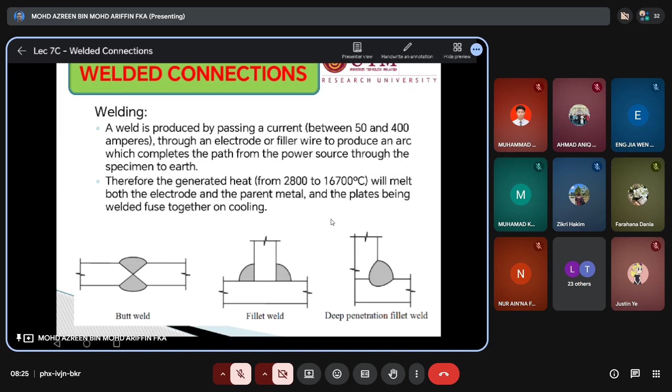Under welded connections, the most common types of welding processes consist of shielded metal arc welding, also known as stick welding.

The second process is gas metal arc welding, GMAW, or metal inert gas, MIG. Next, gas tungsten arc welding, or tungsten inert gas, TIG, GTAW. And the last one, flux core arc welding, or FCAW.

For the introduction, you need to search more reference books or articles. You can search in the library as well as online.

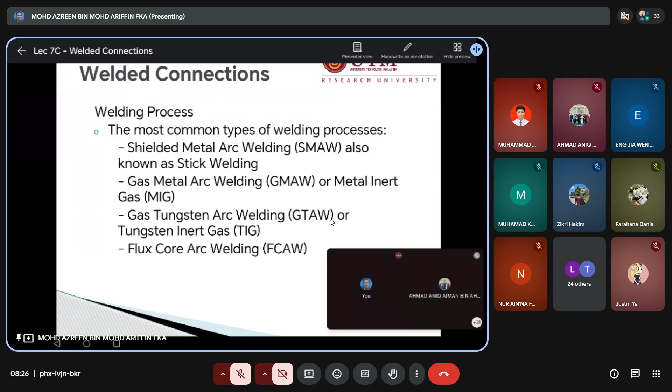This is the types mentioned just now: SMAW, GMAW, FCAW, and GTAW.

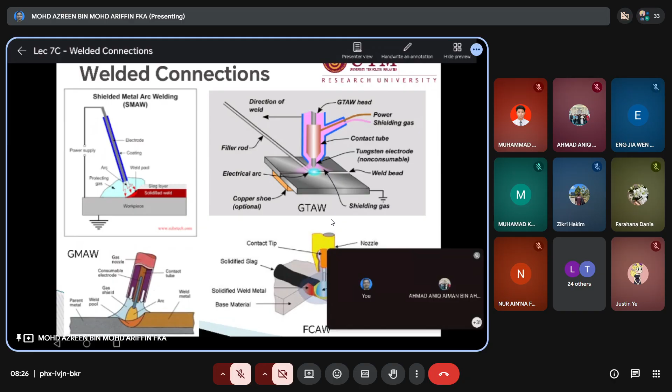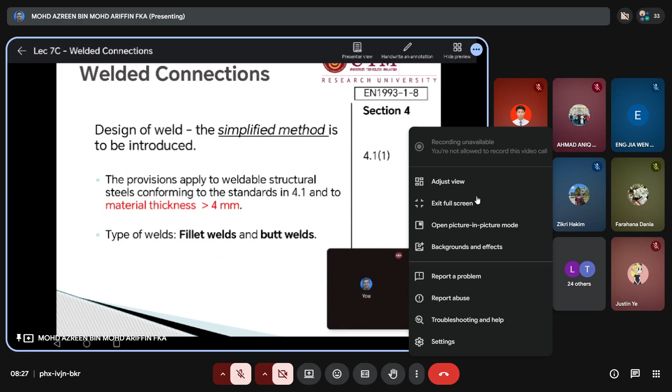Now look at EC3. I always mention you need to familiarize yourself with your EC3. Bring it everywhere, in soft copy and hard copy as well.

Can you turn to Part 1-8 again and again until you familiarize yourself with it? Part 1-8.

Part 1-8 is meant for the connection design for both types, bolted and welded. Today, you can refer to both welded connection.

The requirement is that material thickness must be more than 4 millimeters. And then we focus on the type of weld. Two types, which are fillet weld and butt weld.

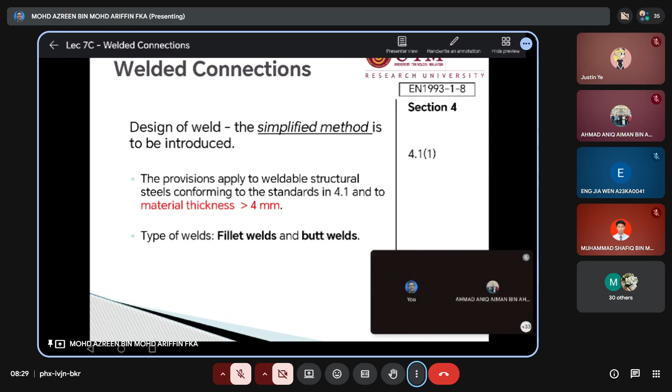Next, typical welded joint. Just now we mentioned that material thickness must be more than 4 millimeters for the welded joint, welding joint.

There are several types of joints, which are butt weld or butt joint, corner joint, T-joint, edge joint, and lap joint. So this is the type of welding joint.

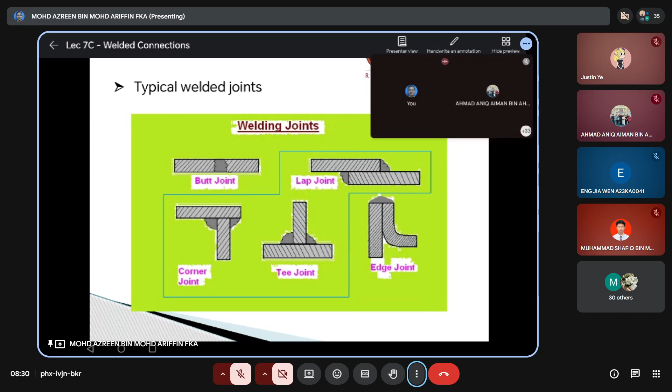Under 4.3.2.1 up to 4, especially for the fillet weld, there are requirements as well. The first is that the angle of intersection should be in the range of 60 degrees and 120 degrees.

Next, if less than 60 degrees, the weld should be considered to be a partial penetration butt weld. That is the requirement for fillet weld. If less than 60 degrees, the weld should be considered a partial penetration butt weld.

And if more than 120 degrees, the strength of the weld should be determined by testing. This is all under items 4.3.2.1 to 4.

If I refer to my EC3 book, turn to page 38 and 39, Part 1-8, please. You need to familiarize yourself with the EC3. I always mention you deal with time, so everything in the EC3 you need to recall and familiarize, so it's easy for you to refer to it.

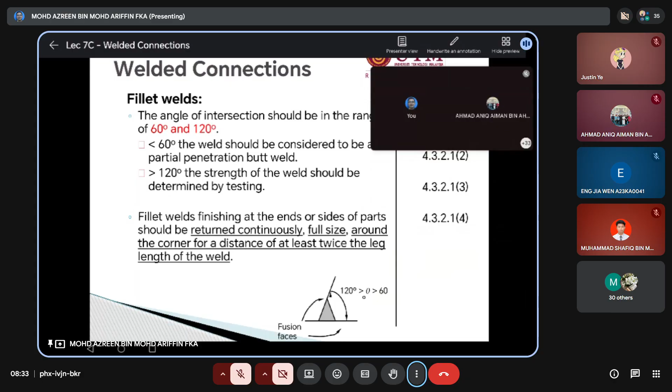The second point is: fillet weld finishing at the end or side of a part should be returned continuously, full size, around the corner for a distance of at least twice the leg length of the weld. Next requirement, okay, the second type is butt weld.

Mentioned under 4.3.4.1. Turn to page 40, 41, and 42, and so on.

The first part under butt weld: they mention a full penetration butt weld is defined as a weld that has complete penetration and fusion of weld and parent metal throughout the thickness of the joint.

The second point is partial penetration butt weld, defined as a weld that joint penetration which is less than the full thickness of the parent material.

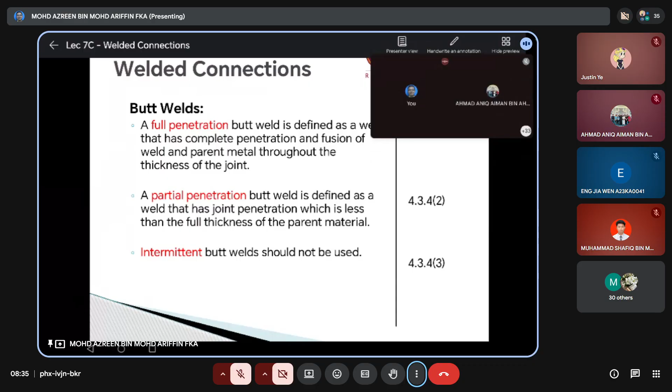Next, intermittent butt weld should not be used. Any questions so far? Are you following? Please respond. Anyone? Yes. Okay, next, thank you.

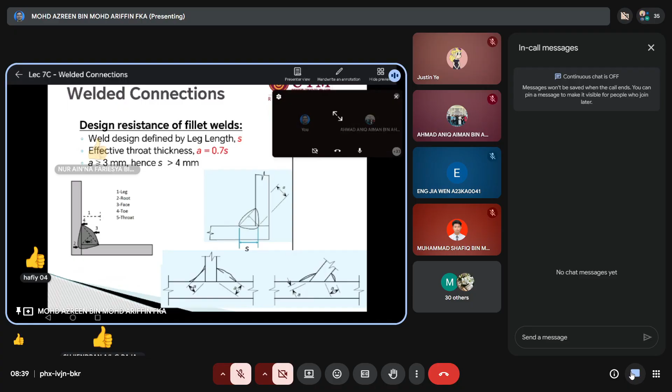Can you follow? Can you understand? A little bit more. Okay, you can put a sign if you follow, please. I cannot hear or see your response. Can you respond? Come on, please respond. Are you following?

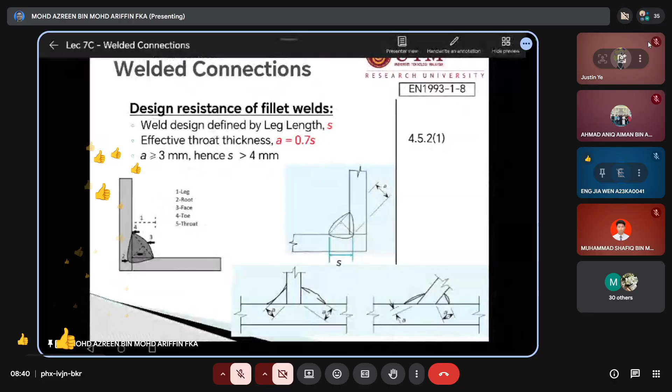Again, we should know LE as well, the symbol for effective length of weld. You can see in the figure, LE is equivalent to L, the total length, minus 2S, twice the leg length for both sides. That's what is meant by effective length of weld, symbol LE. This is under item 4.5.1 and 2.

Next, if LE is less than 30 millimeters or less than 6A, whichever is larger, it should not be designed to carry load.

Okay. LE equal to L minus 2A can conservatively be taken as L minus 2S.

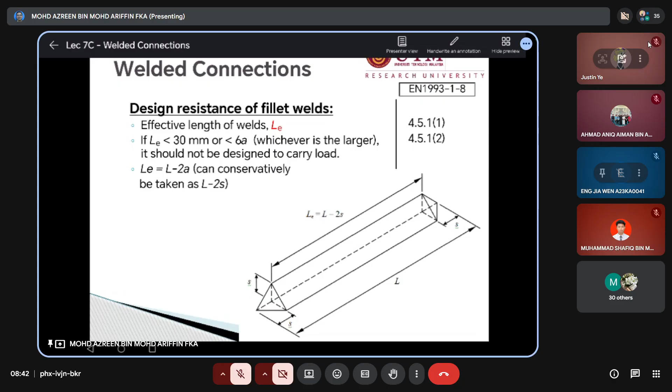Alright, next. After we know about LE equal to L minus 2S or L minus 2A, we can start design for resistance. Design resistance FW, the symbol is FWRD.

Okay, as a principle, we always know that the resistance must be more than the effects, action or loading, so that FWED must be less than or equal to FWRD.

Now we need to calculate FWRD, equal to FVWD, where FVWD is the design shear strength of the weld times A. FWED is the design value of the weld force per unit length, kilonewton per millimeter.

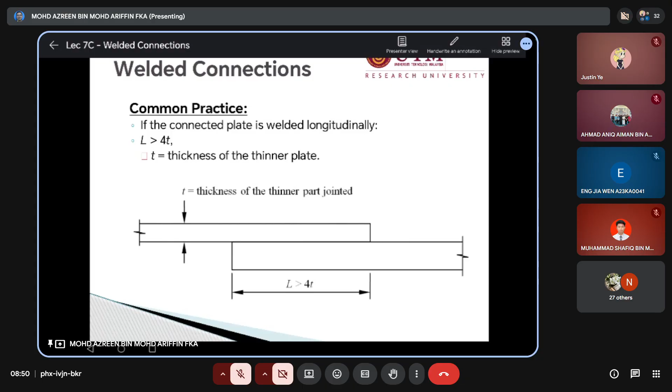Common practice: if the connected plate is welded longitudinally, L more than 4T, where T is the thickness of the thinner plate part jointed. You can see the figure showing you the thickness of the thinner part jointed, T, and the part of L that is jointed must be more than 4 times T.

How do you want to analyze this figure? Let me show you the solution. This figure shows you the solution based on several types of forces. Number one, weld subjected to axial force only. Same goes to the bolted connection - there are several types of analysis for the bolted connection.

It is under direct shear force or moment - outplane moment, or another one is in-plane moment. Same goes to the welded connection. It's different analysis for bolted and welded connection. Why? Of course, different material - one for bolted, another one for welded connection.

Now we can focus on how we want to design the welded connection based on axial force only. First of all, we can assume P as the forces, axial force, P. In this case, number one, assume P equivalent to LE1, effective length 1, plus LE2, effective length 2, based on the figure. If there is LE3, we need to add LE3 again. But in this case, there is only LE1 and LE2.

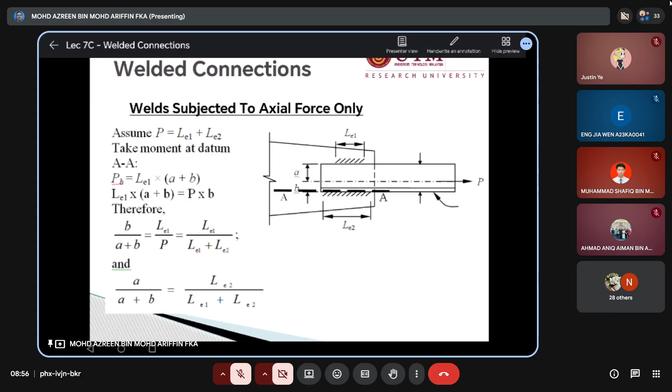This is equivalent to LE1 over P, equal to - so you need to elaborate more - LE1 divided by LE1 plus LE2. And if you take about A, then you need to ratio again: A plus B equal to LE2 divided by total LE1 plus LE2. Okay, let us make an example.

For this example, we call it example 5. Determine the weld length if only side welding is applied on the connection as depicted below.

Okay, given to you the size of this section: 65 times 50 times F, where F is the thickness, and L is the symbol for the section, single angle section. We can call this unequal single angle section because the sizes are not the same, 65 and 50. So we can call that unequal single angle section.

Value of B. Everybody? I don't want to continue if there is no response from you. No, Aina, okay, thank you. So how about A? How to get the value of A? Can you speak? Can you tell me how to get the value of A from the section given? Come on. Mohamad Amit, can you tell me how to get the value of A?

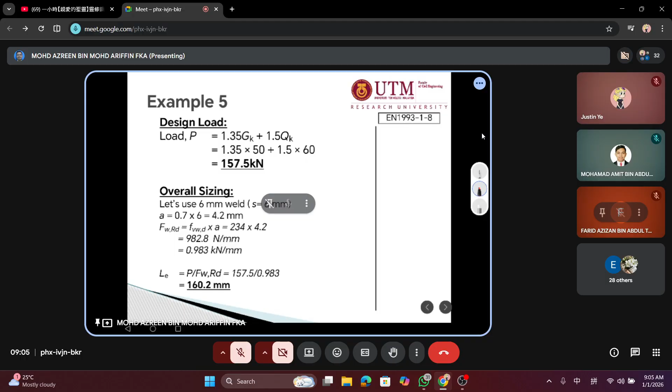Okay, for the next we have to know the LE, or overall sizing, LE and L1. Overall sizing, LE and L1. Okay, so this is under the axial force only. Axial force only. Okay, next, overall sizing, how to analyze it.

Let's use 6 millimeter. If there is no given leg length S, you can assume leg length S is equivalent to 6 millimeter. And then for the effective throat thickness A, equivalent to 0.7 S. Okay, you can straight away get the answer for A, 4.2 millimeter.

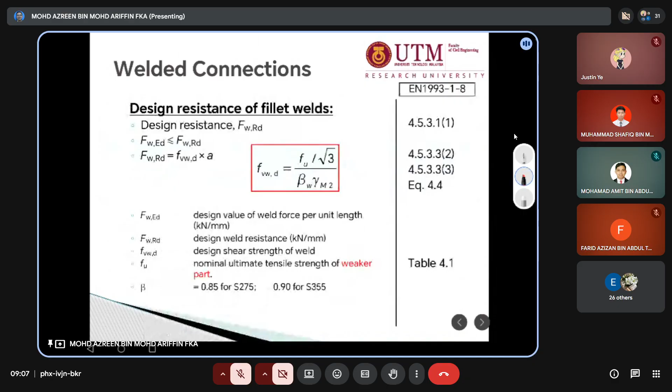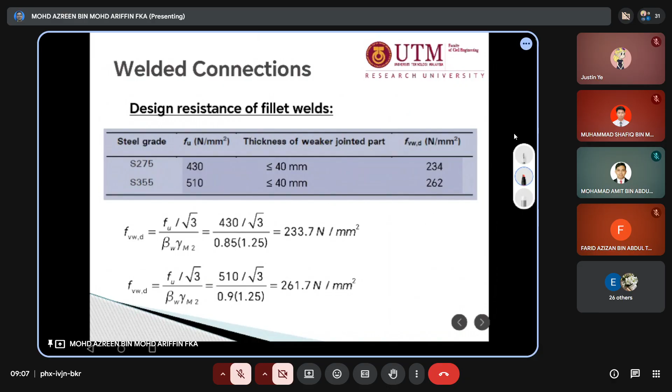Now you can have the design resistance FWRD, equivalent to FVWD times A. FVWD times A is equivalent to 234 times 4.2. 234 is from here: if your steel grade is S275, FU equivalent to 430, and FVWD equivalent to 234 Newton per millimeter square if the thickness of the weaker jointed part is less than 40 millimeter. Straight away you can have the value here, 234. Now you can convert to kilonewton per millimeter run.

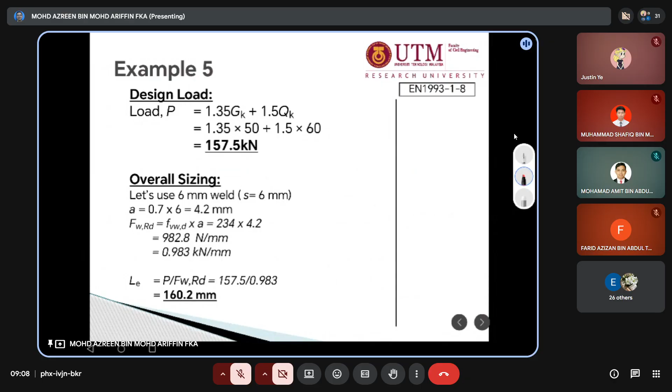Is equal to 0.983. So therefore, LE is equal to P over FWRD equal to 157.5 divided by 0.983. You can have the value of LE is equal to 160.2 millimeter. And then for the detail sizing,

LE is the total. It's the total of LE1 plus LE2 plus TW, where TW is the overall depth of the angle section, the overall depth of the angle section.

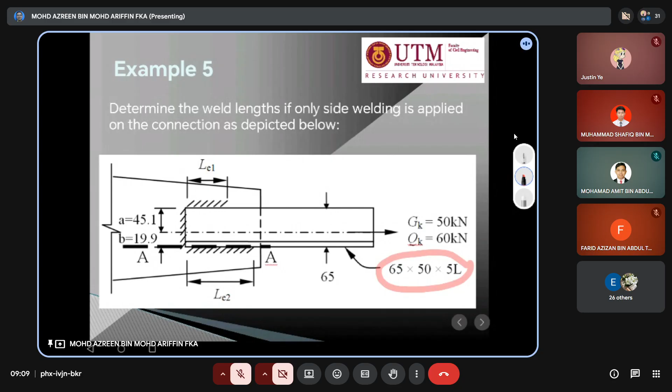moment at datum AA, and then you can find other value if you have the total LE based on the moment at datum AA, where LE1 is equivalent to 16.5 millimeter. You can double check after this class.

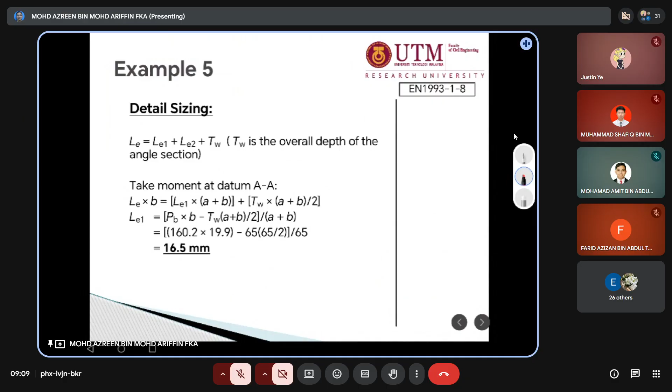16.5 millimeter. Now we can have another LE2 value from the same question, from the same equation. LE2 equivalent to LE minus TW minus LE1, equal to 78.7 millimeter.

Now, you can have another thing: total length L1 and total length L2 for the applied weld length with end turning. This is for the final value of L.

After you find the effective length, you have to give to the welder, the man who wants to weld the jointed, the welding jointed. Now, what is the value for L1 and L2? L1 is equivalent to LE1 plus S, and L2 is equivalent to LE2 plus S. You remember that. This is under axial force only.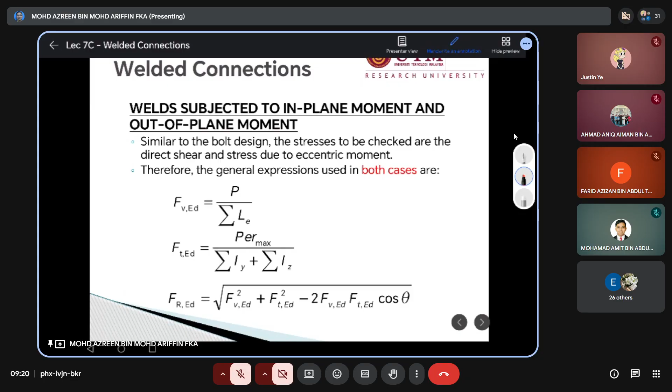This is for the R max hypotenuse. R max hypotenuse. Okay, this R max hypotenuse.

I think this we already discussed under the bolted connection. I will go straight away to the example, I think, to this example.

Okay, we have example 6 and 7. Example 6 gives you the figure: determine the appropriate weld size for the connection shown below. Always remember E is the distance between the centroid to the design load, or the point load, or the design load. 150. Design load here is 400 kilonewton, from the centroid E, 150 millimeter, to the P design load.

There are two faces or two surfaces for this case, for this bracket. Then P is pointed at the design load at the point between two surfaces, between two surfaces. That's why we need to calculate P is equivalent to divide by 2: 400 divided by 2 equals 200. And then the next design load is 200, P.

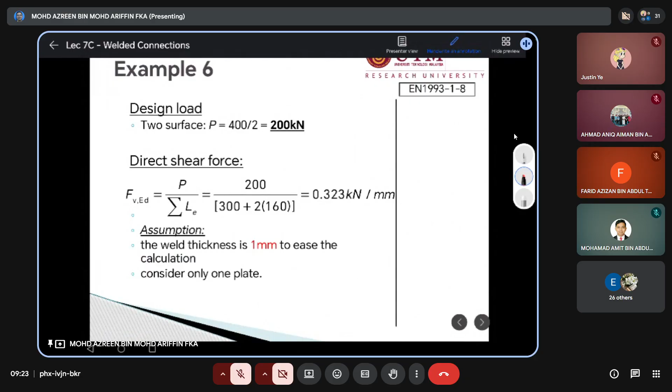Assumption here is the weld thickness is 1 millimeter per run to ease the calculation. Consider only one plate.

Summation of A, 1 millimeter run times length 300 plus 2 times 160, meaning bottom and top. 160 bottom and top, the welded length times 2 for bottom and top, and the side at 300 millimeter length. The total for this A, summation A, is...

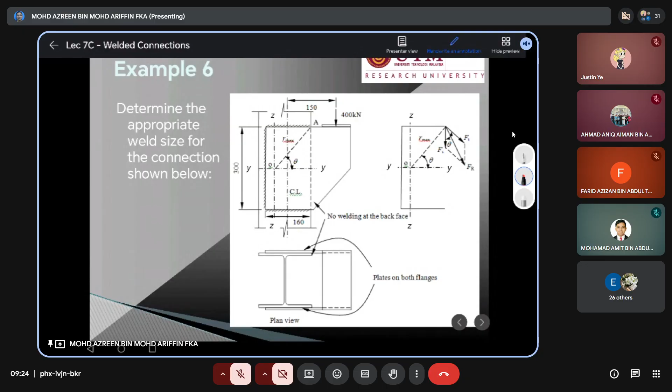620 millimeter square. Okay, so you need to find the Y bar as well, equivalent to 2 times 160 times 1 millimeter run times 80, times 80 is the... 160 divided by 2, divide by 2, over 620 millimeter square gives you the Y bar... 41.3 millimeter from left.

Now you can calculate the IY and IZ based on the Y bar and so on. IY equivalent to BH cube divided by 12 plus 2 times 160 times 150 square, gives you the answer 9.45 times 10 power of 6 millimeter power of 4.

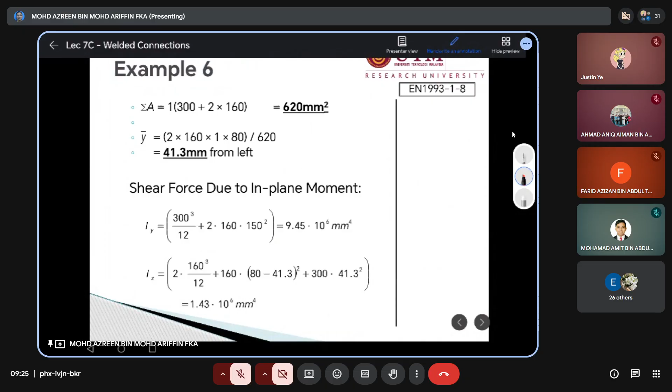Same goes to IZ. This also you need to practice after this class. 1.43, please double check, 1.43 times 10 power of 6 millimeter 4.

Next, Rmax based on hypotenuse. 160 minus Y bar from the left, square, plus 150 square, gives you the answer of Rmax 191.3 millimeter.

So FTED equal to P times E moment, P times E moment times Rmax divided by summation of IY plus summation of IZ, which is already calculated. Then you just include the value in the equation, and you can have the value of FTED, 0.664 kilonewton per millimeter.

Then the resultant force based on this FVED and FTED, you can have the resultant force ED from the vector sum, 0.90 kilonewton per millimeter. And for the sizing, we can have PL equivalent to FR, 0.9 kilonewton per millimeter run. If we have the S value 5.52, then the applied 6 millimeter fillet weld is sufficient.

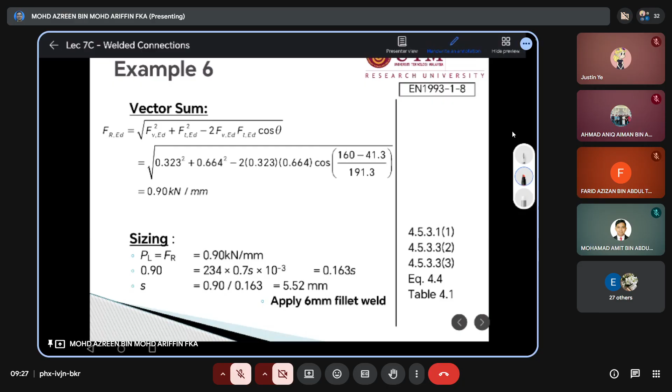Before the last example, example 7, there is no question so far. The last example for today, example 7, another type of moment for welded connection. Determine whether the connection shown below is safe to be used.

Design load as usual. Total weld length LE, for flange, 173.2 given to you, minus 2 times 8, both sides, top and bottom, for this equation. Flange and web. Web minus 2 times 8, both sides. 8 millimeter gives you 8 millimeter grade 35 welding.

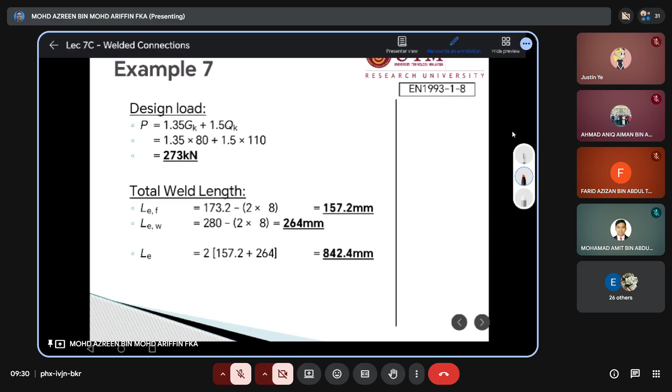842.4 millimeter, times 2 because of both sides. Then calculate the direct shear force FVED, P over summation of LE, 273 divided by 842.4 gives the answer of 0.324 kilonewton per millimeter. Then shear force due to out of plane moment, assume the thickness of the weld is 1 millimeter to ease the calculation.

IY is equivalent to 2 times BH cube over 12 plus 157.2 times 364 divided by 2 square, gives the answer of IY 13.48 times 10 power of 6 millimeter 4. So Rmax is not hypotenuse.

Straightforward, 364 divided by 2, 182 millimeter. Then we can have the FTED, P times E times Rmax divided by summation of IY. The answer is 0.770 kilonewton per millimeter run.

So vector sum for resultant force ED is equivalent to FVED square plus FTED square, square root. Gives the answer of 0.835 kilonewton per millimeter run.